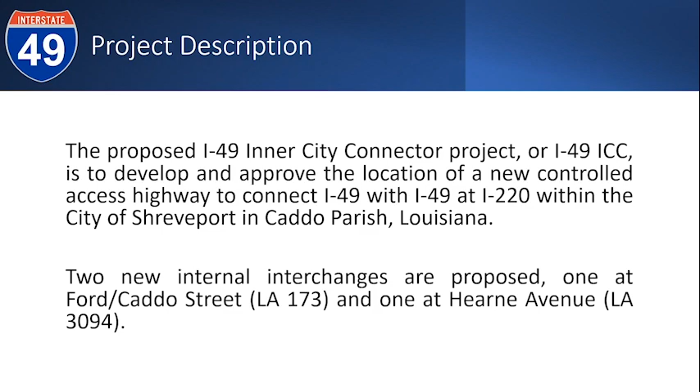The proposed I-49 Inner City Connector Project, or I-49 ICC, is to develop and approve the location of a new controlled access highway to connect I-49 with I-49 at I-220 within the city of Shreveport in Caddo Parish, Louisiana. 2 new internal interchanges are proposed, one at Ford Caddo Street and one at Hearne Avenue.

It's important to understand the National Environmental Policy Act and how it impacts the development process. NEPA was passed in 1969, establishing the first major federal environmental law. It requires agencies to use a systematic interdisciplinary approach to consider environmental effects for all projects.

The Department of Transportation and Development's NEPA compliance process consists of 3 primary phases. The first is informal coordination with the lead federal agency. The second includes constraints mapping, developing a range of alternatives, and preliminary evaluation. The third phase, which is where we are now, includes project initiation, scoping, documentation, and a decision.

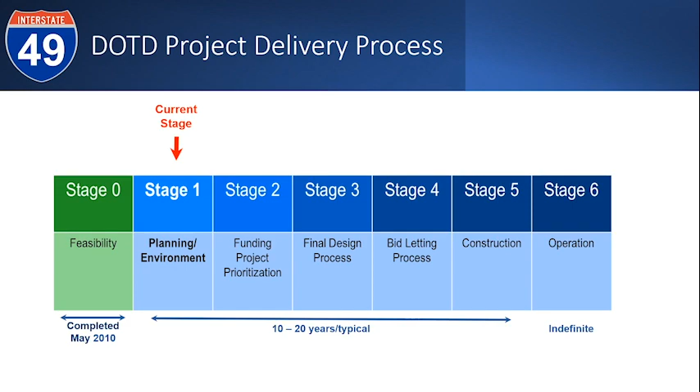There are 7 stages to DOTD's project delivery process. Stage 0, the feasibility stage, was completed in 2010. Stage 1, our current stage, was initiated in 2011. This project's purpose and need is to provide improved connectivity between existing I-49 and the I-49 I-220 interchange, providing for economic development created by improved access to the interstate system.

The original plan, developed in the 1970s, included the I-49 Inner City Connector section from I-20 to I-220. But due to funding constraints and community concerns, the I-49 ICC section was dropped from the plan. Since that time, the inner city community has continued to experience a decrease in population. A feasibility study for the I-49 Inner City Connector was completed in 2009, and an environmental document was started in 2011, which included build alternatives 1 through 4. Build Alternative 5 was added later in response to public comments suggesting a loop alternative.

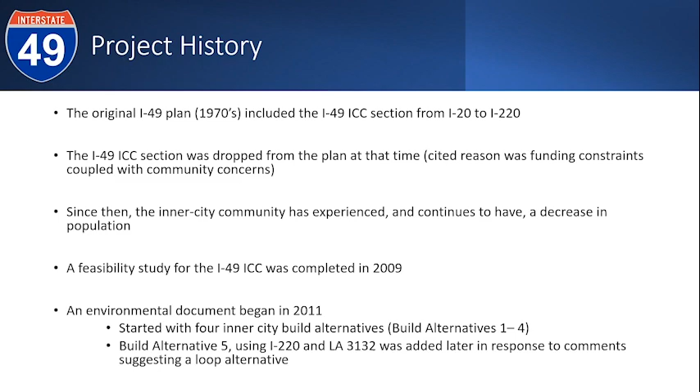As the project progressed, Build Alternative 4 was eliminated after the previous round of community input meetings in 2016 due to that option's impact to historic properties. Cultural resource surveys were conducted for the remaining alternatives, with approximately 2,000 structures inventoried. The State Historic Preservation Office named Allendale as a potential National Historic District and noted that National Historic District St. Paul's Bottoms has experienced significant losses.

This is important because many historic properties may also be considered Section 4F resources, which means they are eligible for listing on the National Register of Historic Places. 4F resources also include publicly owned parks, recreation areas, and wildlife or waterfowl refuges. If 4F resources could be impacted by a project, alternatives must be considered that remove or lessen potentially adverse effects.

Build alternatives 1, 2, and 3 would adversely impact the potential Allendale National Historic District and would cross part of the St. Paul's Bottoms Historic District. And build alternative 5 would adversely impact Cross Lake. Since all of the build alternatives would adversely impact Section 4F resources, an alternative has been developed to minimize that impact, known as Build Alternative 3A.

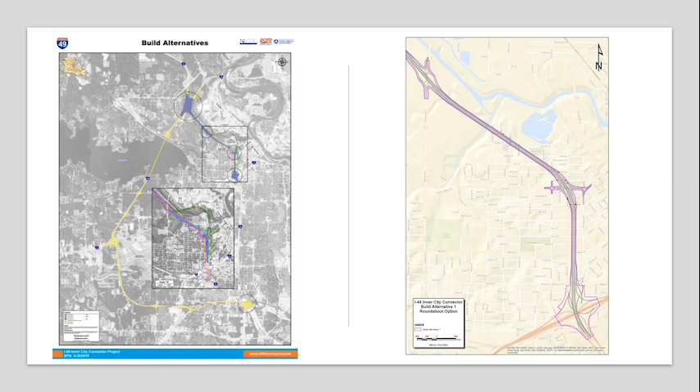As a review of the build alternatives, the map to the left is an overview of all the current build alternatives, including 3A. The map on the right is a close-up view of the general alignment of build alternatives 1 and 2, which shows the westward turn originating at the Ford Caddo Street interchange.

Build Alternative 3A was developed to reduce impacts on potential historic properties, and engineering studies have shown it is a feasible option. 3A avoids impacts to the Cross Lake Recreation Area, which is a primary water supply for the area, and it lessens impact to historic properties, particularly in the potential Allendale National Historic District.

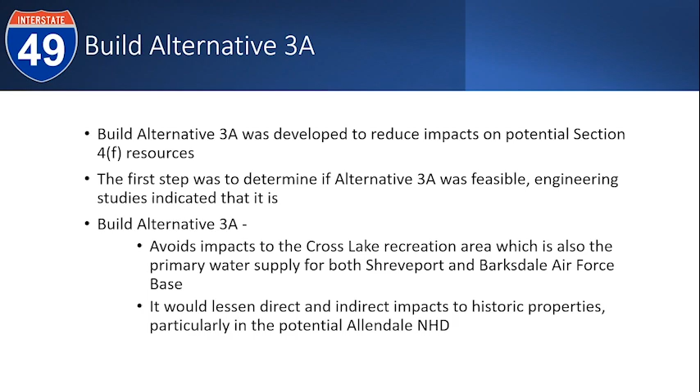Build Alternative 3A passes through the St. Paul's Bottoms National Historic District and is adjacent to the potential Allendale National Historic District. It should be noted that in May of 2014, only 12% of the original contributing structures to the St. Paul's Bottoms National Historic District remained, and since 2014, decay and fires have resulted in even more losses.

The State Historic Preservation Office has indicated the potential for delisting or reducing the boundary of St. Paul's Bottoms National Historic District due to these losses. Most of the remaining historic structures are on piers and could possibly be moved to mitigate impacts.

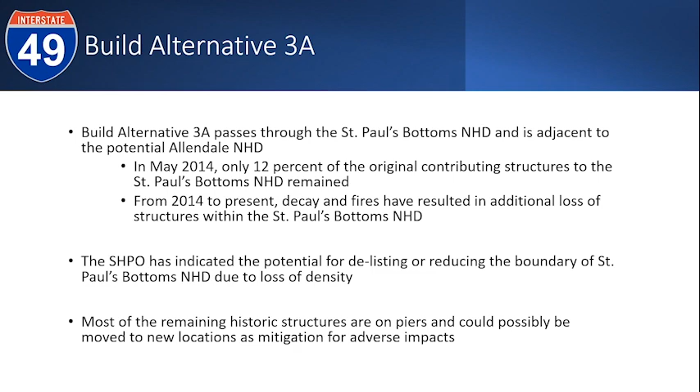Build Alternative 3A essentially uses the same connection with I-49 at I-20 as Build Alternatives 1, 2, and 3, and generally heads north along Pete Harris Drive in similar alignment to Build Alternatives 1 and 2. The most significant difference occurs at and after the interchange with Ford Caddo Street.

Here, Build Alternative 3A continues generally northward, turning west north of the power plant en route to Hearne Avenue, avoiding turning into the Allendale community. Build Alternatives 1, 2, and 3 all turn west near the Ford Caddo Street interchange and continue through Allendale en route to Hearne Avenue.

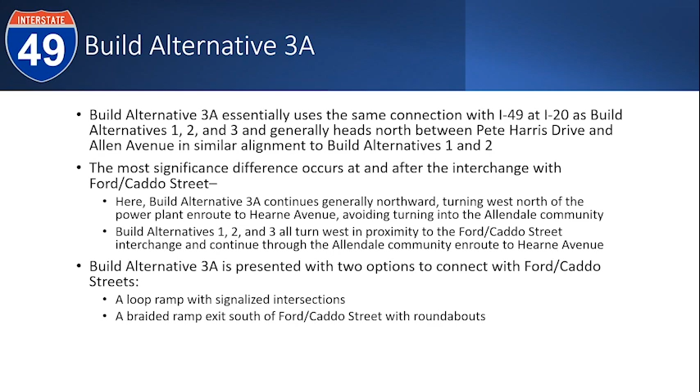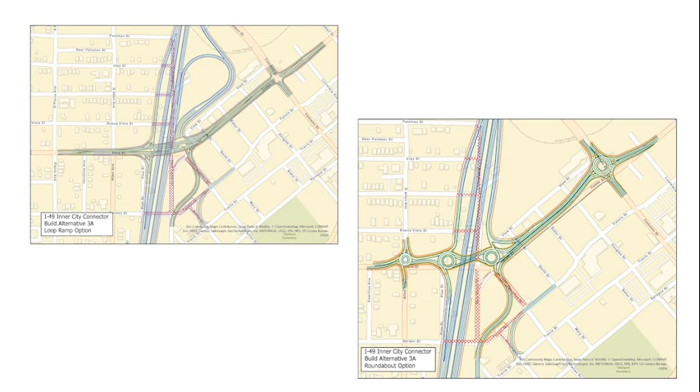These two maps are a zoomed-in look at the Ford Caddo Street interchange area with street realignment and closures shown under the proposed interchange type options. We're presenting both interchange options because they each result in different impacts. Both call for realigning Pete Harris Drive between Garden and Ford Streets, maintaining access at Murphy Street.

With the loop option, northbound I-49 traffic from the I-20 area exits via a loop ramp to Ford Caddo Street and re-enters northbound I-49 around the loop. Southbound traffic from I-220 will exit to Ford Street between Pete Harris Drive and Allen Avenue.

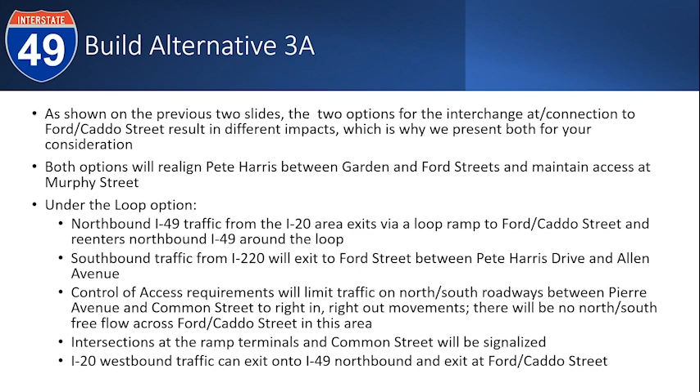Control of access requirements will limit north and south traffic between Pierre Avenue and Common Street to right-in, right-out movements, and there will be no north-south free flow across Ford Caddo Street in this area. Intersections at the ramp terminals and Common Street will have signals, and I-20 westbound traffic can exit onto I-49 northbound and exit at Ford Caddo Street.

Under the roundabouts with the braided ramps option, northbound I-49 traffic from the I-20 area exits via the braided ramp to Pete Harris Drive to the interchange with Ford Caddo Street and re-enters northbound I-49 through the roundabout at Ford Caddo Street. Southbound traffic from I-220 will exit to Ford Street between Pete Harris Drive and Allen Avenue.

With roundabouts at the ramp terminals, Allen Avenue, and Common Street, traffic flows freely on Ford Caddo Street and north-south access remains intact at Allen Avenue. Pete Harris Drive and Allen Avenue can become one-way pairs between I-20 and Ford Caddo Street, with Pete Harris Drive northbound and Allen Avenue southbound, allowing for the conceptual development of a business boulevard-type entry to downtown.

I-20 westbound traffic can exit onto I-49 northbound, but will not have access to the Ford Caddo Street interchange. Traffic studies show this movement is minimal and should not adversely affect current traffic patterns.

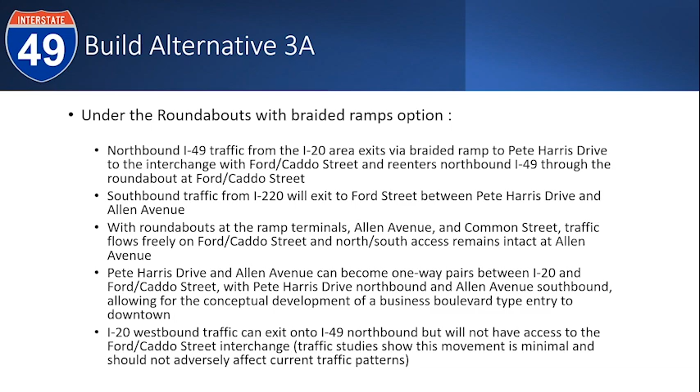Now that you've had a chance to learn about the newest build alternative, we'd like to present some details on how the build alternatives compare relative to impacts. This graph demonstrates the number and types of structures that could potentially be directly impacted by the current build alternatives.

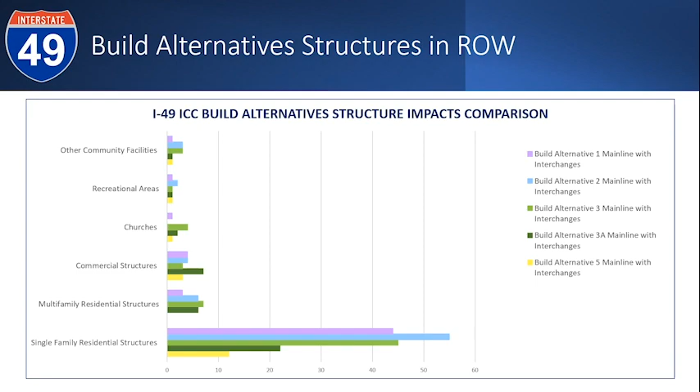This table provides a comparison of impacts to some of the environmental resources affected by the current build alternatives. As you can see, impacts are similar among the 4 alternatives adjacent to downtown. Build Alternative 5 crosses Cross Lake, and it is only elevated across the lake and at ramps and interchanges. The other build alternatives are elevated throughout.

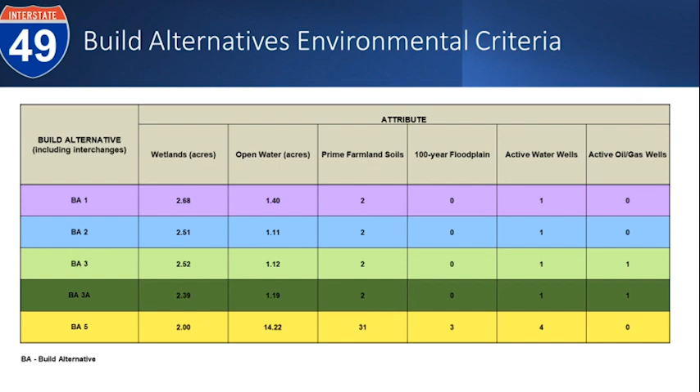As a result, Build Alternative 5 has more impact to open water and prime farmland soils than the 4 alternatives that are adjacent to downtown and do not cross Cross Lake. All of the build alternatives are presumed to have a low to medium chance of impacting archaeological resources, and all but Build Alternative 5 have a medium to high chance of impacting historical structures.

All 5 build alternatives are considered to have a medium-level chance of affecting potential environmental liability sites, which include underground storage tanks, dry cleaners, landfills, and others. None of the build alternatives are considered likely to affect protected species or scenic streams. You can view more details relative to impacts on the I-49 ICC EIS Build Alternatives Comparison Table exhibit located in the exhibit viewing area.

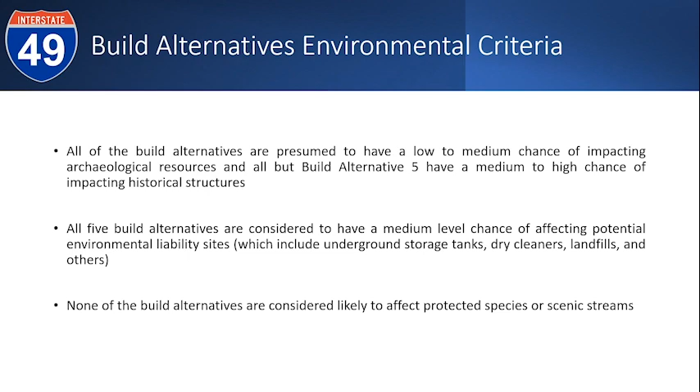As we move forward with the project, one of the most important steps will be considering context-sensitive solutions, or CSS. CSS is an approach to advancing transportation projects in a collaborative manner and in a way that fits into the community and environment in which a specific project is located. This approach leads to the preservation and/or enhancement of scenic, aesthetic, historic, iconic community and environmental resources while improving or maintaining mobility, safety, and infrastructure.

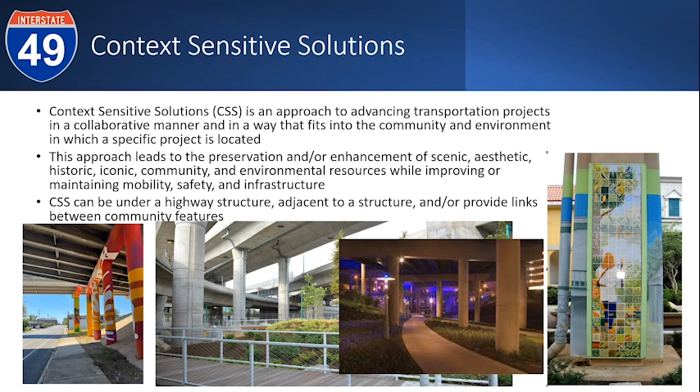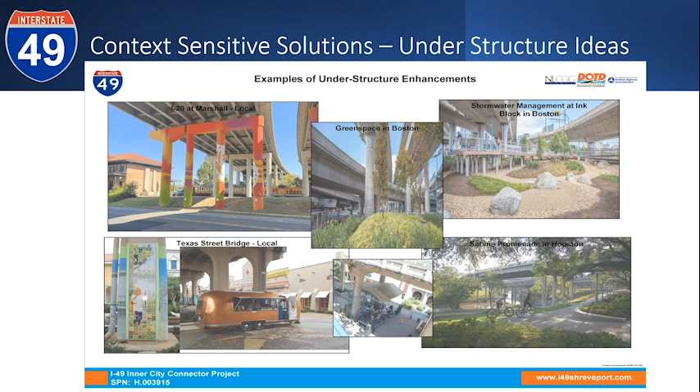CSS can be under a highway structure, adjacent to a structure, and it can provide links between community features. You'll see this in the exhibit area, showing how CSS concepts have been implemented under transportation facilities in both the Shreveport-Caddo area and other parts of the country. These examples are provided to help you to consider CSS concepts that may be of interest to you. We will be reaching out to the community in the future to develop these types of concepts for this project.

We invite you to stay and view the exhibits, share your comments, and discuss your concerns with the project team. You can provide comments directly to a team member, stop at the comment area to submit written or verbal comments, or use one of the comment kiosks to submit comments online. You can also provide comments via mail or email. Comments received by midnight on October 27th, 2023 will be included in this meeting's public record.

So, what happens next? Comments received during this meeting will be compiled, reviewed, and considered, along with all other comments received to date on the project. Public comment, along with potential impacts, both positive and negative, will be evaluated. Based on this evaluation, a preferred alternative will be identified and presented to stakeholders Department of Transportation and Development, Federal Highway Administration, and the Northwest Louisiana Council of Governments for consideration.

Additional technical documents relative to the identified alternative will be required prior to the completion of the draft Environmental Impact Statement document. The draft Environmental Impact Statement, with an identified preferred alternative, will be provided for public review and a public hearing will be held.